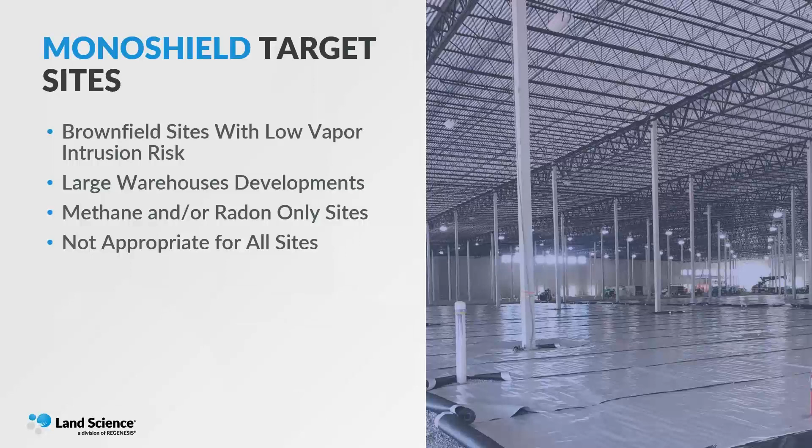Some states do reference the federal guidance, the US EPA. Some of them even reference the ITRC, but they don't have their own internal guidance. Why is that important? Well, if you're working on a site in a state that doesn't have vapor intrusion guidance, then you could be dealing with a cluster of different options of what people are proposing, if they're even proposing anything.

So, it is important to look through this and understand if there is a vapor intrusion mitigation guidance, and what the state is referencing. If you aren't familiar with our website, you can go to our website. We do have links to each of these states. And if there is a guidance or a mitigation guidance, it's there.

So the importance is here's where a limitation could be for MonoShield. Some states are going to require a thicker barrier, a 60 mil, thousandths of an inch. So you're going to want to know that as you move forward. So that's why we put that bullet in there, that it may not be for all sites.

So now let's get a little bit into the weeds. MonoShield is a composite system. We make note here that it's up to 30 to 40% faster installation than an HDPE heat welded, as I mentioned. Where the speed comes is how we're seaming this barrier together. It rolls out, and then it is seamed together with a spray applied nitrile core, and we'll get into that detail quite a bit in a little bit.

But you can also see why we're referencing it as MonoShield. You're going to see there on the right a metallized film layer. This is an innovative concept that we've worked through with our research and development team to identify a higher chemically resistant barrier at a thinner concept. So out was born MonoShield, and now we have the metallized film, and it's one layer that really increases that chemical resistant aspect.

And as you'll see here, it has a geotextile bottom, and that geotextile base is important so that it can lay across the aggregate and not have concerns of punctures or issues. Even though we do have a high level of puncture resistance in the PET, which is the top, and the metallized film, we wanted to have even further constructability and control over that barrier as it's going to be laid out across quite a few different types of aggregate.

It's easy to install. The advanced composite sheet incorporates continuous layers that include the aluminum, as I referenced, and it's a tear-resistant and standalone barrier. So with that being said, as a preemptive measure, you can lay this barrier out, spray the seams, and you've got yourself a preemptive vapor intrusion barrier.

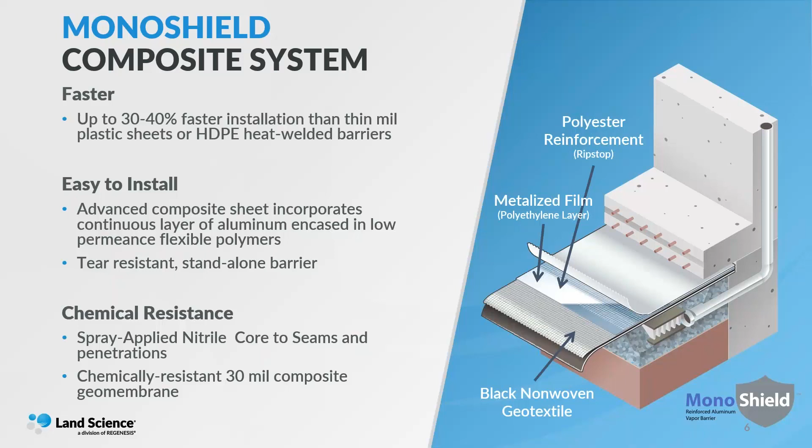So as I mentioned, and we'll get more into the detail, the chemical resistance is not only in the metallized film, but some of the weaker points in vapor barriers are the seams, the penetrations, and the perimeter. So we have created a new spray applied nitrile core to address this in the seams, in the penetrations, and perimeters.

Coming down just a little bit further, you're going to see the same diagram to the right, but I wanted to get into that a little bit more on the metallized film. You're going to see here that metallized film encompassing across the entire base layer, with the exception that at the end of each of the layers, there's going to be no geotextile, and that's done strategically.

So as we do these seams, we get a seamless transition as we spray the core across. It is a very flexible product, even at 30 mils, and that's the total thickness composite of the geomembrane, adding the geotextile, the metallized film, and the PET. So the 30 mil gives you that durability, but also it's still very flexible and durable to be able to bend and move as you need to.

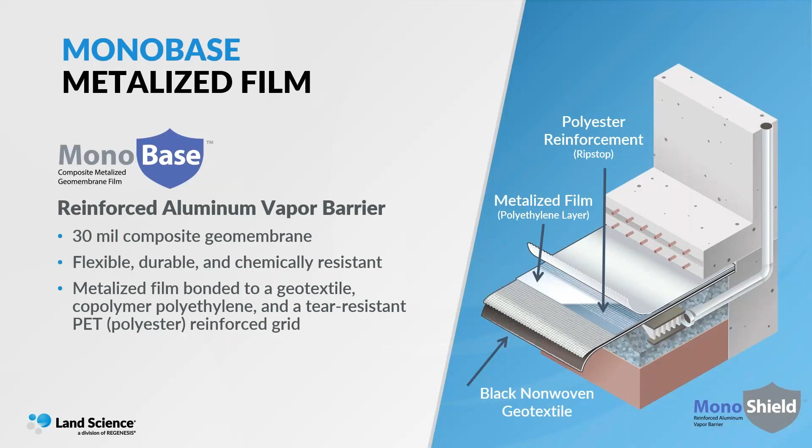You're going to see there that we reference the metallized film that's bonded, and that's important. So even if you see in the right picture, there's a series of layers, I don't want you to walk away from this thinking that it's just coming across that way when you have the product in hand. It's one sheet. It is thermally bonded to create one sheet as a whole when it comes to the site.

But you can see we're going to offer, and we do offer, that you're allowed to smoke test this. That's important. There are actually some state guidances out there that will require that or highly recommend. Smoke test is important because you find your weakest link. The smoke test is literally pumping the smoke underneath the barrier, and you're looking for smoke to come through the seams, the penetrations, or the perimeter, and if there is any imperfection in the base layer itself.

As I said, it's a fast application, 30 to 40% faster, and you're getting the significant value of that sprayed seam. We do have a certified applicator network, as I touched base when we was introducing land science, and that's important to understand that the certified applicators know the process of how it needs to be installed. We work intimately with our certified applicators on a case-by-case basis to verify that they understand the process, because each site could be a little bit different.

And then, as I reference here, is the high seam integrity. One of the weakest concepts of a barrier is if that seam fails. We'll walk you through in a little while as far as the information of how those seams go. But what's important is to understand that we work to create this spray applied seam so that we have a seamless type system.

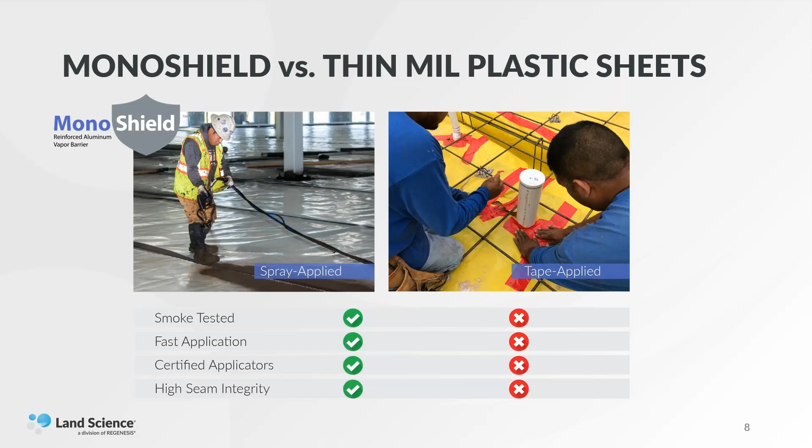Great, thanks, Tom. And so, as has already been mentioned, MonoShield has been designed to be durable and be very easy to install. And those features were certainly key as we produced this or developed this product. However, I'd like to take a moment and just describe some of the chemical resistance testing that we conducted as we developed MonoShield as a means to ensure that the system would adequately reduce the VI risk that we're trying to address. So to accomplish this, our land science R&D team tested a variety of materials as we got our way to MonoShield and the actual material we are using today.

And then the top chamber you can really think of as the indoor air. So that's the area that we're going to measure and really be able to evaluate the performance of these barriers, how much contaminated vapors are coming through. And so throughout these studies, we sampled the bottom chamber to ensure that the challenge concentration remains constant throughout the study, and also in between tests, so that every barrier has the same challenge concentration no matter when we're testing it. And then we take the samples from the top sample port, and again, that's where we really evaluate how much vapor has diffused through the barriers.

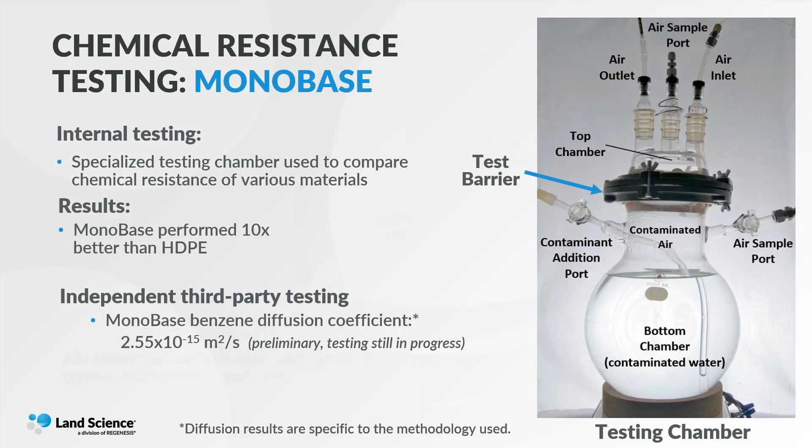However, the order of magnitude is already telling us that this barrier will sufficiently be able to reduce the VI risk for the type of sites, these low risk vapor sites that Tom described, where MonoShield is designed to be used. Okay.

And then finally, very briefly, I just want to point out that we've also used the same internal testing procedure to evaluate the other component of MonoShield, which is the monocore. That's the spray applied asphalt that Tom described and is used to spray around the seams and penetrations, and really is key to having a complete barrier that doesn't have any leaks for those vapors to come through.

And again, in an effort to have a robust chemically resistant system, we actually worked to modify the formula of the asphalt, and we use a nitrile polymer in the asphalt. So just like we go to the lab and we choose nitrile gloves to provide more protection, the same idea is here. So we added that nitrile polymer, and we found that the monocore is about 10 times more chemically resistant than other types of spray applied asphalts that are out there.

So in combination, this testing of both of the components of MonoShield, both the monocore and the monobase, has allowed us to really demonstrate that the MonoShield system does have very good chemical resistance in addition to that ease of installation and durability that Tom already described. So with that, I'll send it back over to Tom, and he will get into some of these construction details.

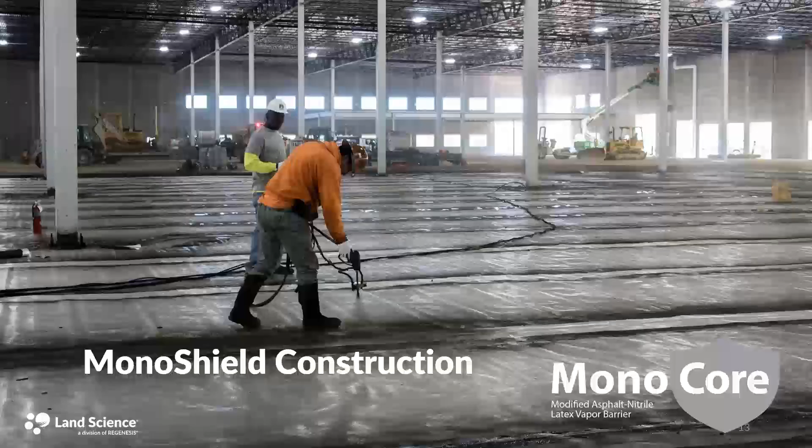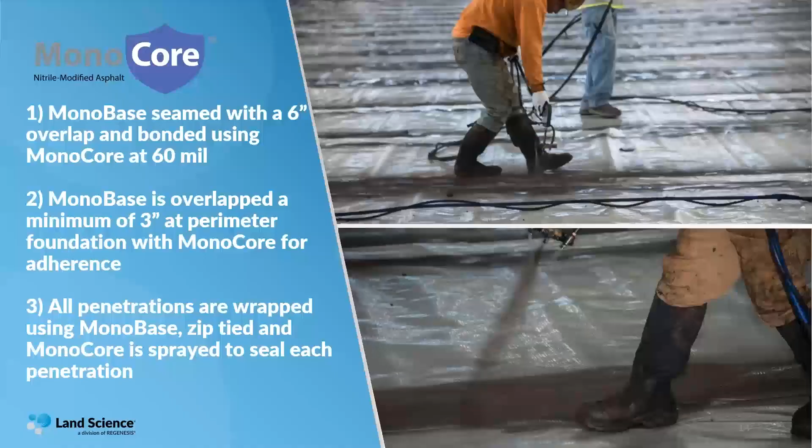Great, thank you. So, we're going to transition here now to the MonoShield construction, as I kind of gave the tickler for a little while that we're going to get into showing these seams and a little more of the detail of it. You can see here, this is just a quick picture of the actual product going down and the seams being sprayed. So the mono base, as I said, is seamed with a 6-inch overlap and bonded using the monocore that Kristen just outlined at a 60 mil spray.

So what that means, and you'll see a detailed diagram coming up, is that they're spraying 60 mils, laying out the mono base over the top of that at a 6-inch overlap. Then on top of that overlap, there's another 30 mil of monocore being sprayed over the top, creating that seamless effect. Mono base is overlapped a minimum of 3 inches at the perimeter foundations with the monocore for the adherence.

So again, limiting having to use any type of taping, any type of other adherence, using just this monocore that, as you just heard, has been tested to be chemically resistant against these low-level contaminants. All the penetrations are wrapped using the monobase, and then they're zip tied, and the monocore is sprayed to seal each penetration.

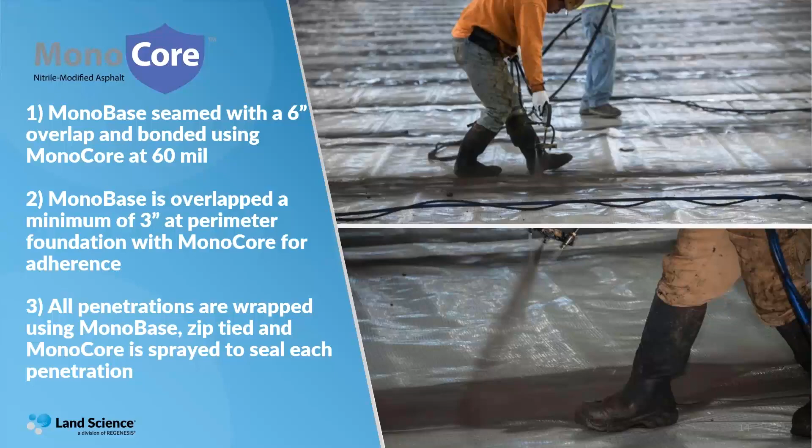And as you heard, the nitrile spray applied core is a new product that we're combining as our monocore with the MonoShield. It has improved chemical resistance. So as you heard from in the laboratory, but even think in the medical field, where you'd be hard pressed to find latex gloves, and it's because of the chemical resistance.

It's the puncture resistant. And in our world, we can also say that with our monocore, we have no VOCs in this spray applied core because, well, that would be very important. If you're trying to protect from VOCs, you don't want to add them. But in the industries, things continue to evolve, and we thought, what an opportunity to see if we could create a new type of spray applied core that would be even more chemically resistant. And out was born the monocore.

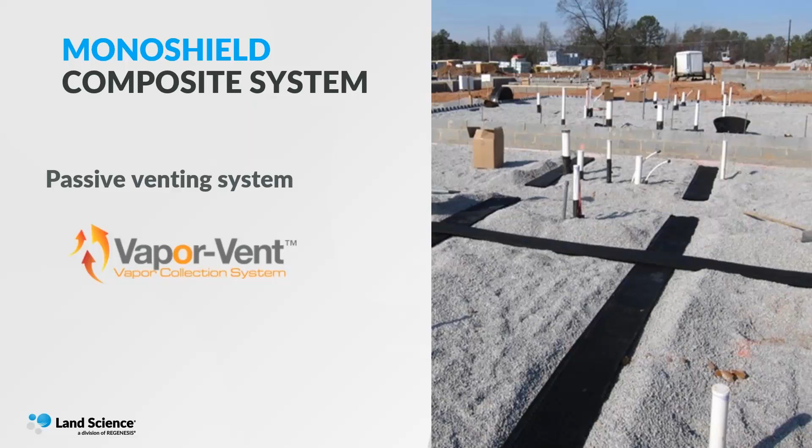I also wanted to point out that MonoShield can be in combination with vapor vent. So it can still have a passive venting system beneath it. And in fact, we highly recommend it as a redundant type system. It gives you that opportunity to have a vent, a relief valve, if you will, beneath these barriers, so if there were any accumulation of vapors.

As I mentioned, we're going to get into some of the details. This is a perimeter detail for MonoShield and how you could tie into that perimeter. Some of you may know every perimeter is not the same. So this is one example and what we have internally crafted as a general design. However, what we pride ourselves on is we are design assistants, and we can help go through this. If you're considering MonoShield, we highly encourage you get in touch with our Land Science team. We work together with you, looking through any of the diagrams that already exist in the construction world, and we identify what would be the best perimeter termination.

In this example, you'll see on step 1 where the monocore is sprayed and the mono base is brought up on a 6-inch overlap. If you heard me earlier, it was a minimum of 3 inches. So in this one here, we're doing 6 because we have the opportunity to do the 6. The larger the seam that we can tie to the perimeter, the better. But then step 2 is imperative as we sandwich that base layer with the core, creating a seam that will not have any type of leak. But again, one of the weakest concepts of the barriers are the seams, the perimeters, and the terminations. So the termination is still going to be smoke tested to confirm, even if you have step 2 complete, that you have an airtight barrier.

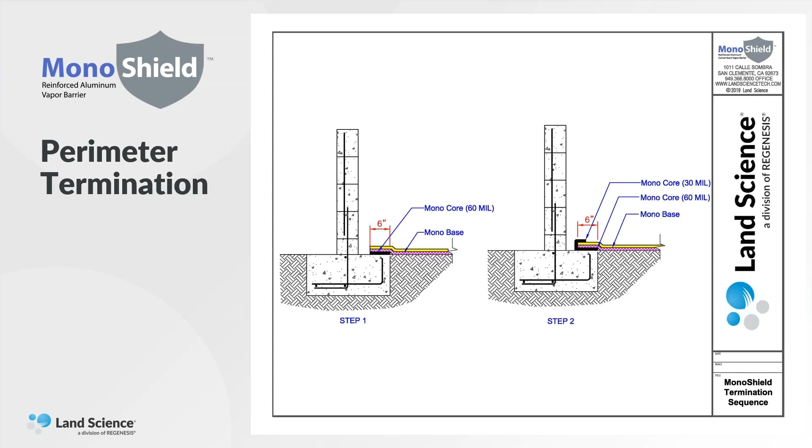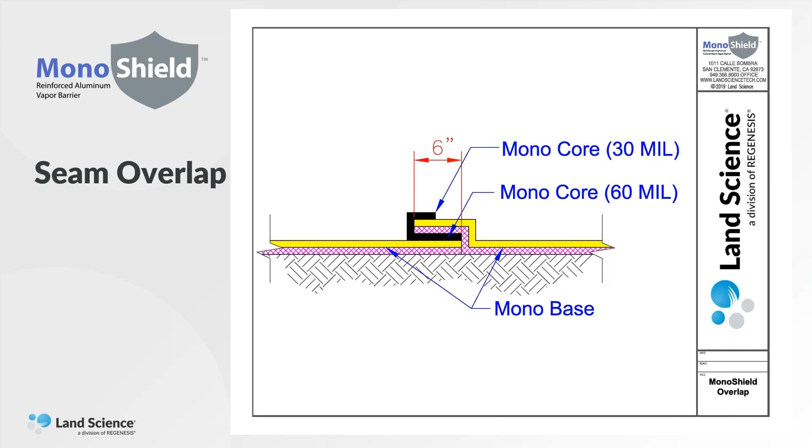This is just a quick diagram to show you visually the seam overlap. So the seam overlap is what I just showed you with the animation, also in some of those pictures. It's a monocore at 60 mil, then the next base layer is brought over the top at a 6-inch minimum overlap, and then the monocore is sprayed over the top of that, sandwiching it together. Then once we visually have completed that, we can go through and do the smoke testing of the area to confirm that it is airtight.

Another bullet here is the inspector training and certification. So that's important, and if you're not familiar, our certified inspector training is actually done online, and you will go through the training process to understand what to look for when you're on site to verify that the barrier has been installed. We do encourage and or require it based on the type of warranty offered. With MonoShield, there are limited warranties.

So the more important thing with the MonoShield would be that the inspectors are there to visually verify that the barrier is being installed and smoke tested correctly. And then an inspection report can be prepared and then submitted to us for documentation. As I put here, the bullet point is smoke testing.

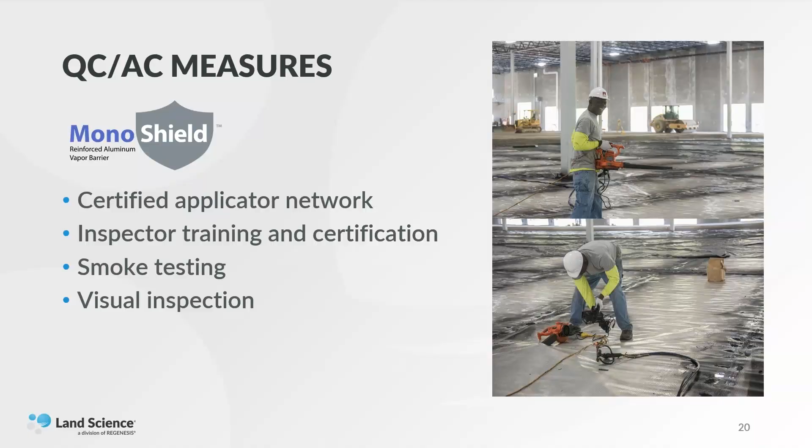Liberty Park is being transformed currently into a property that's going to bring many jobs and growth to this community. If you're not familiar with the Sterling Heights area, it's what they referenced as Automotive Alley. And as the Motor City continued to evolve, they had to spread their wings in the urban areas, and they went up into Sterling Heights and created a series of automotive manufacturing. A lot of those have gone away, but the opportunity here was that now these sites sit quite blighted, but now with the brownfield re-incentivizing programs, they're having the opportunity to redevelop them.

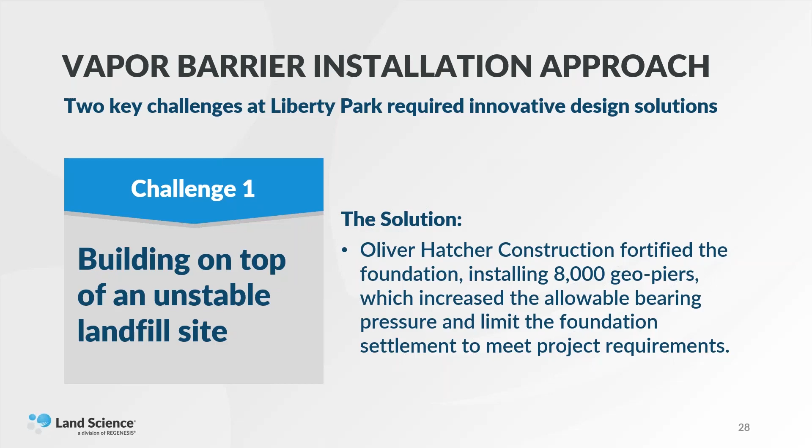Two key challenges at the Liberty Park required innovative design solutions. The second was the cost associated with long distance concrete pumping, as I already mentioned. So they were able to put an 8-inch layer of stone on top of the MonoShield, followed by the building slab. And hence why I was getting to that important concept that MonoShield is durable. They were able to put an 8-inch layer of stone over the top of MonoShield, so they didn't have to have this long distance concrete pumping, which in turn gave a cost benefit by avoiding the extra cost of pumping concrete over a very large area.